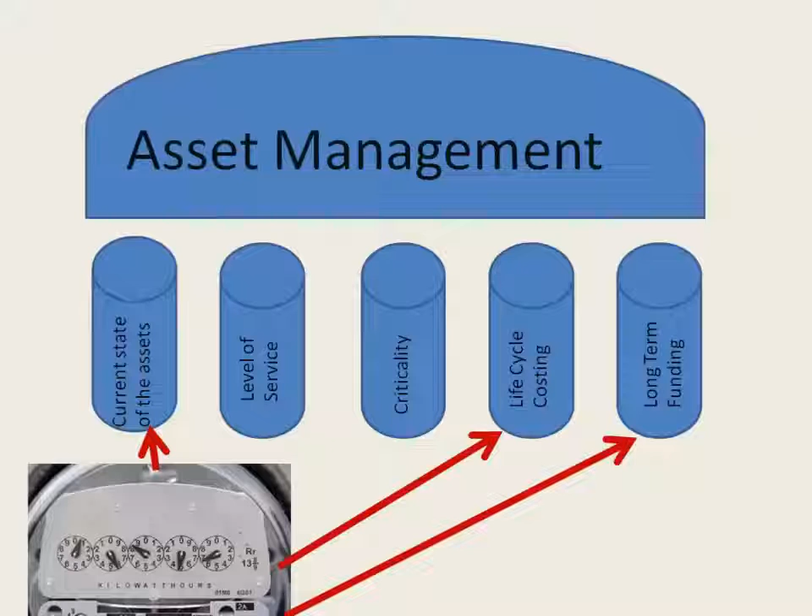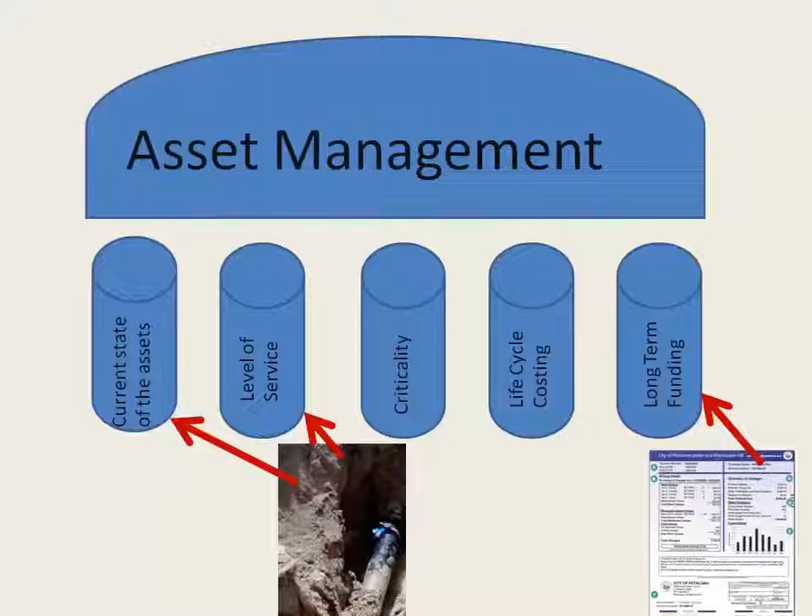One of the things we do as well is energy efficiency, and energy efficiency ties very directly to asset management. As you're doing your asset inventory during the current state of the assets, you'll collect information about the energy use of your assets. Then when you get to the process of determining in the life cycle costing segment what you want to do when you want to replace an asset and what you want to replace it with, energy efficiency is going to come back because you're going to look at whether you want to replace an existing asset with something that may be more energy efficient. Finally, energy has a big impact on the funding required because energy is oftentimes one of the most expensive components of your system.

When we get into water loss, which we are also going to talk about today, that has a direct impact on the condition of the assets, which is part of our current state of the assets. It has an impact on level of service because we may set goals for how much water loss we will find acceptable. And then it also has an impact on the funding because if we're producing a lot of water that we're not selling, we have an expense, but we're not receiving the revenue from that.

Another very big aspect of our work is rates and fiscal planning. Much of the revenue for water systems comes from fees and charges to users, so it's very important to know how to set those rates because that will have a big impact on the funding available to do all the other parts of asset management.

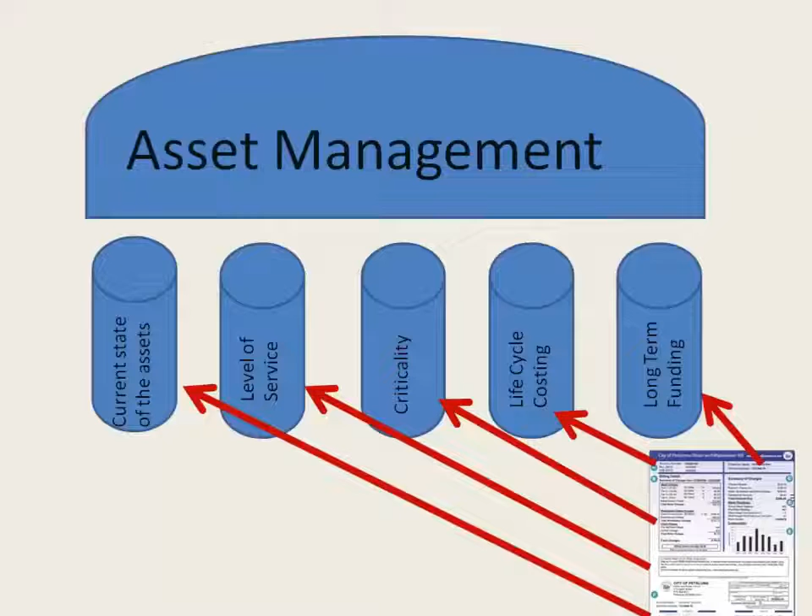Finally, I'd like to just talk a little bit about water system cooperation. When water systems work together, it can help them in a lot of different ways, and cooperation can be anything from just talking to each other up to sharing operators or bookkeepers, sharing management, to the other end of the spectrum being actually interconnecting with somebody else and forming a new water utility. If systems use cooperation just to help work through asset management alone, it can help you get through all 5 core components.

You might not have any other connection with the system, but you might want to work with them and say, let's work through an asset inventory together, or let's look at how you set level of service goals. So look to each other to help out in that area.

Energy efficiency and water loss are very directly connected as well. When we produce water that's leaking out of the pipe, we have to use energy to produce that water. So if we can cut down our water loss, we will cut down our energy use. Energy efficiency and water loss management are the two most controllable costs that go into our rates. So if we can reduce those costs, it can help us by allowing us to have money for other things, or help us out with the rates.

Small systems don't really have the economy of scale that a bigger system has. So it's important for us to look for ways to achieve that economy of scale, and one of those ways is by working together. I mentioned several ways that systems can work together. If you find a way to work together, it can help you reduce your overall cost.

So back to today's topic. Today's topic, we want to look at aging infrastructure with specifically a focus on the impact on water loss. So a quick review of webinar 1.

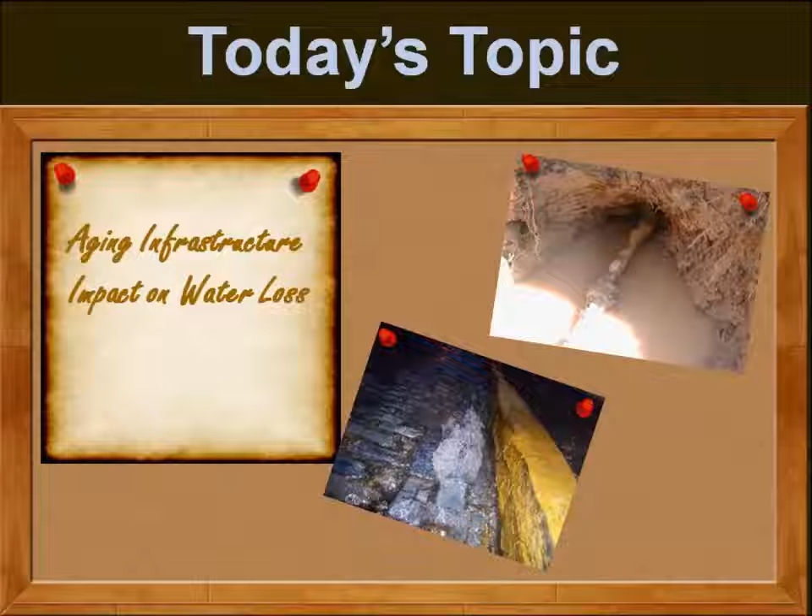What do we want to think about when we're talking about aging infrastructure? One of the things we talked about last time, which is very important, is what do we really mean by the term aging? We want to get away from the thought that all we're talking about is how old a specific asset is, because age is but one factor that determines the condition of an asset and what you want an asset to do.

So we really want to get beyond that and think of aging infrastructure as really when our assets are starting to reach the end of what we call our useful life. We'll talk a little bit more about useful life in a moment.

We want to look at our systems not as an entire combined holistic system. In this case, we want to look at individual assets and how those individual assets are performing. So again, when we get to our useful life, we want to look at the useful life of individual assets, and not a whole system, or even a class of assets together, like all hydrants, because they're not all going to act the same or last the same amount of time. So we really do want to get down to individual assets.

We want to think about all of our asset classes. Oftentimes when we think about aging infrastructure, it's discussed in the context of just our piping assets. We really want to think about all of our assets, vertical and horizontal. Horizontal assets are those in the field, like your pipe, your hydrants, your tanks. Vertical assets are your pumps, your wells, your treatment units, and we want to think about both of those.

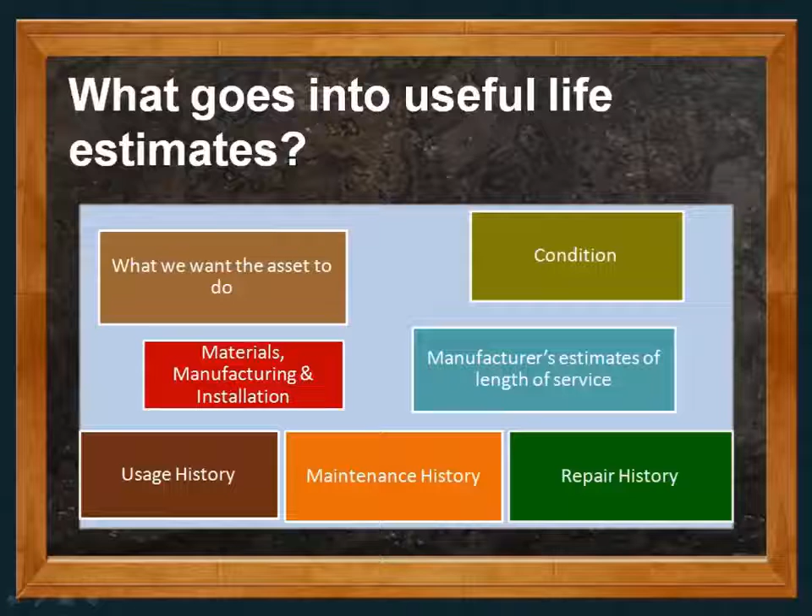For today, we want to concentrate just on our piping system and just looking at distribution piping. So I'll bring back this useful life estimate of piping, and what we're going to talk about is two things: one is what we want the pipe to do, and the other is all the rest of this stuff and how that impacts the degradation or aging of the pipe.

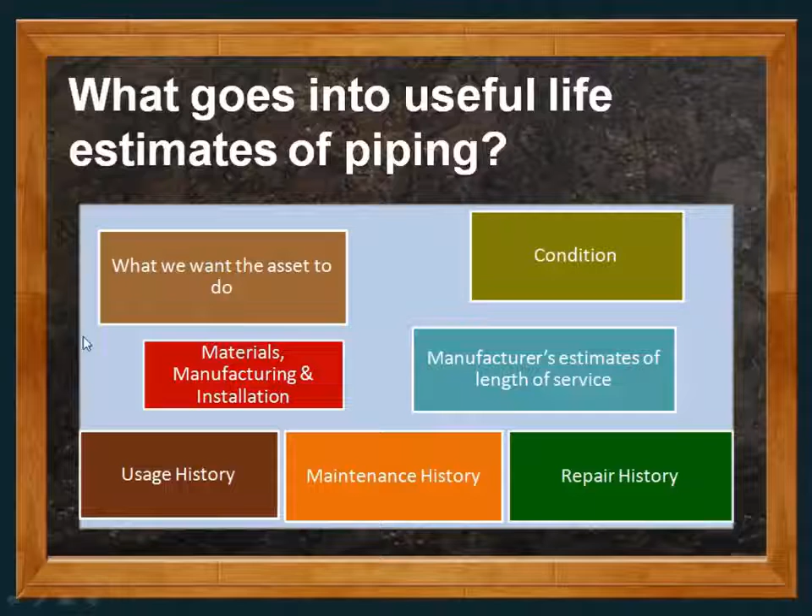So when we have pipe, what might we want that pipe to do, or how might we want to set a level of service for our pipes? We might want to look at things like the number of breaks per mile, or the number of breaks per segment, however you want to break that up. We might want to have a value and say we'll accept this many breaks per mile or per segment, but we really don't want any more, and if a pipe reaches that level, maybe that's the point where we need to replace it.

We might want to look at things like the number of service interruptions, either per customer or per year. We might want to see how much are we shutting people off. We might want to look at the amount of real water loss and set a value and say we're only going to accept so much water loss.

We might want to have a number of catastrophic breaks, and when I mean a catastrophic break, something that's not just water flowing down the street, but something that causes a lot more problems. Maybe it causes a major sinkhole, or causes a road collapse, or causes a problem for a business, or something like that - when the water has a much bigger problem than just a typical main break where some water runs down the street and we can fix it.

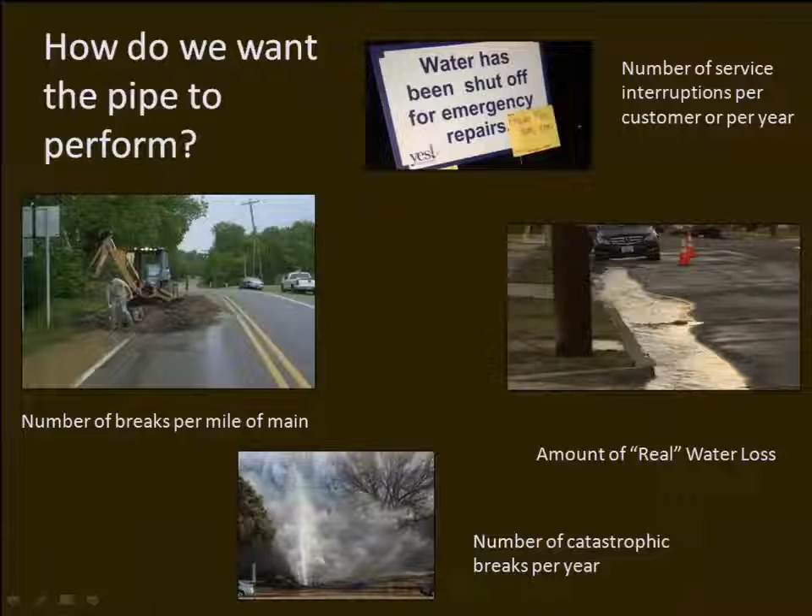So all the other factors I'm going to kind of lump into: how do the pipes age? How do they degrade? How do we get from a brand new piece of pipe to one where there's been a lot of degradation, there's holes, there's missing pieces of pipe? How do we go from one state to the other? There's a lot of factors that go into that, and I've separated them into three different categories. The first category being physical.

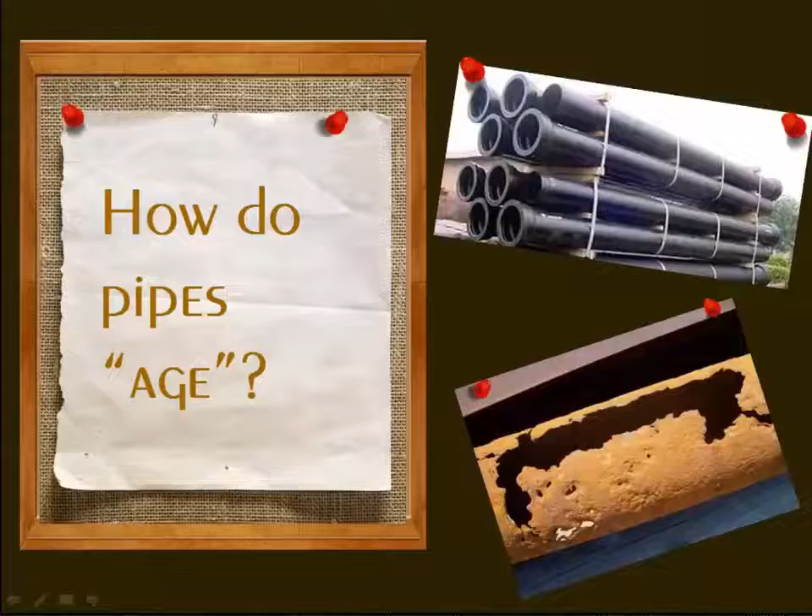The major factors affecting deterioration are age, length, material, diameter, manufacturer, joint type, the vintage, lining and or coatings, how deep the pipe is buried, installation, wall thickness. So all of these physical factors that make up the pipe will affect its deterioration.

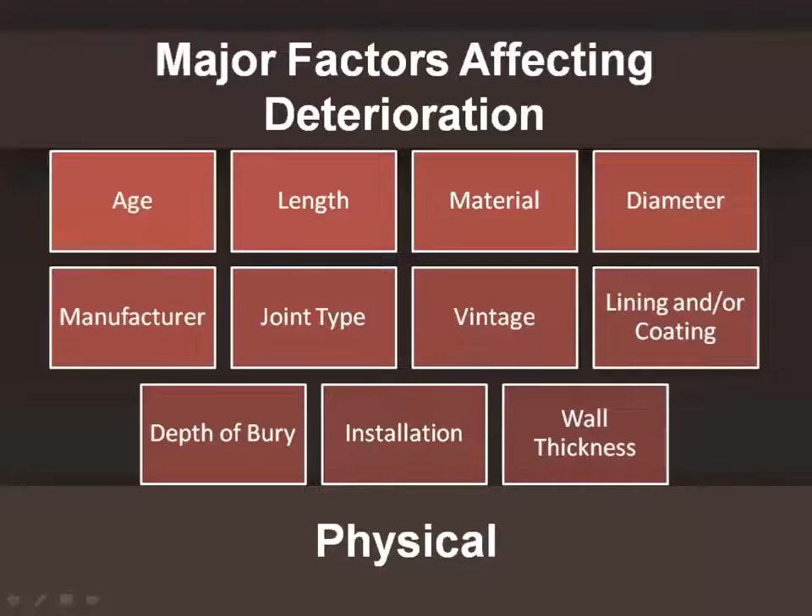The next is operation and maintenance: break history, cathodic protection, whether you've protected the pipe, and water quality inside your pipe. Repair and rehabilitation methods, the flow velocity through the pipe, what kind of O&M you do, like flushing or cleaning the lines, how you operate your hydrants, and whether there's water hammer if someone's not doing it properly. And then finally, the internal water pressure—what is that pressure inside the pipe, and does it vary a lot, or is it pretty constant?

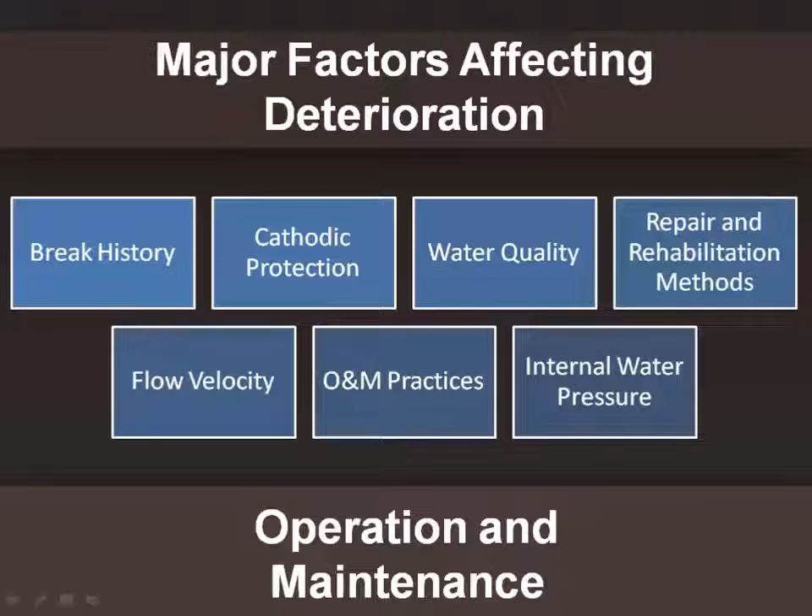Then environmental factors—things affecting the pipe from the outside. The surrounding soils, frost, traffic loading, and the quality of water outside the pipe. If this pipe is subjected to groundwater, what is the quality of that water? The bedding under the pipe or the backfill above it. If there are any stray electrical currents from other utilities around the pipe, or underground disturbances like construction going on near the pipe. And finally, the climate it's subjected to—like here in Albuquerque, it's desert conditions, relatively mild, whereas in Buffalo you're subject to very cold and snowy, or in Washington State, a different climate. All of these factors add up to affect the pipe.

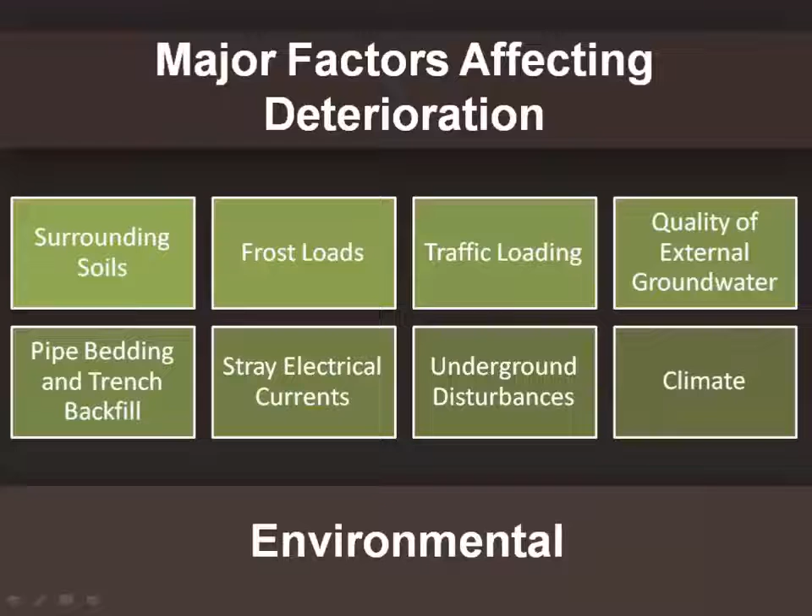The deterioration can be internal or external or both. Forces acting on the outside of the pipe can have it degrade from the outside in, or forces acting on the inside of the pipe can have it degrade from the inside out.

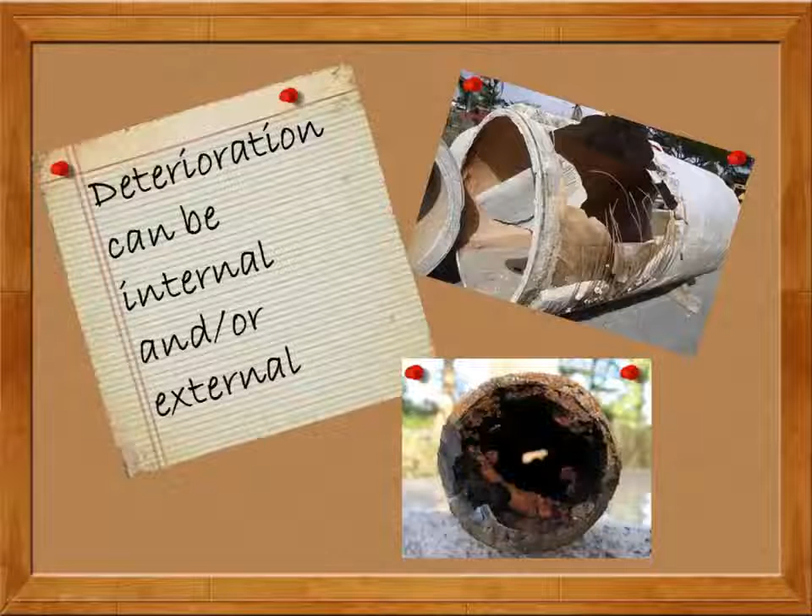The problem is that we don't really have a good way to determine the condition of this underground infrastructure. It's not possible for us to see inside and outside the pipes all the time. We may get a glimpse of a pipe during a repair, but generally we don't really get to see the inside or outside of our pipes. As we just discussed, there's a really complicated mechanism for deterioration—all those factors acting on a pipe—so it's very complicated to figure out how each of those factors affects the pipe. The deterioration is very site-specific, and it's hard to study in situ, meaning in actual ground conditions, because it's hard to see what's actually happening. For all these reasons, it's not that easy to determine the actual condition of your underground infrastructure.

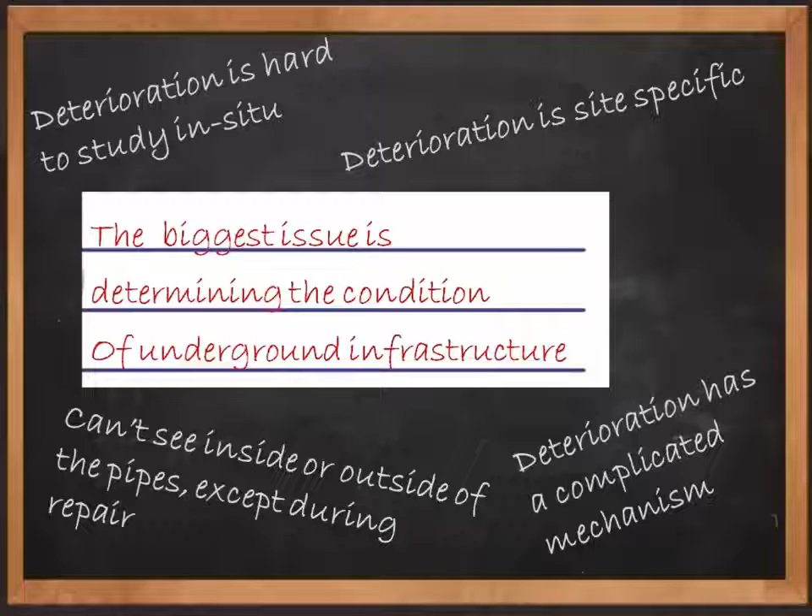There are some technologies that will help us get a better picture of what's going on in our pipes. There are several of them. Some are devices that you put inside a pipe, and some stay outside the pipe where you just hit a connection point and can figure out things like wall thicknesses. Some can take videos of the inside of a pipe, and some can check for leak noises or look for leaks.

The problem is these technologies tend to be pretty expensive to deploy. They take skilled workers to put them in, and a group who can analyze the data. Sometimes you have to build insertion points to put the devices into the system. So for very small systems, this is not going to be something you'll want to do because it's too expensive. The results are also dependent on the technology you use—you'll get different results depending on what technology you use. It's not like all the technologies provide you the exact same data; some give different data than others.

And then there's converting the results into actionable information. Once you know the condition from this evaluation, what do you do about it? How do you translate that into exactly when you should replace the pipe? Sometimes that's not as easy as we would like. And finally, you have to match the technology to the pipe—you have to look at whether this technology will work on a certain kind of pipe or size of pipe, that type of thing.

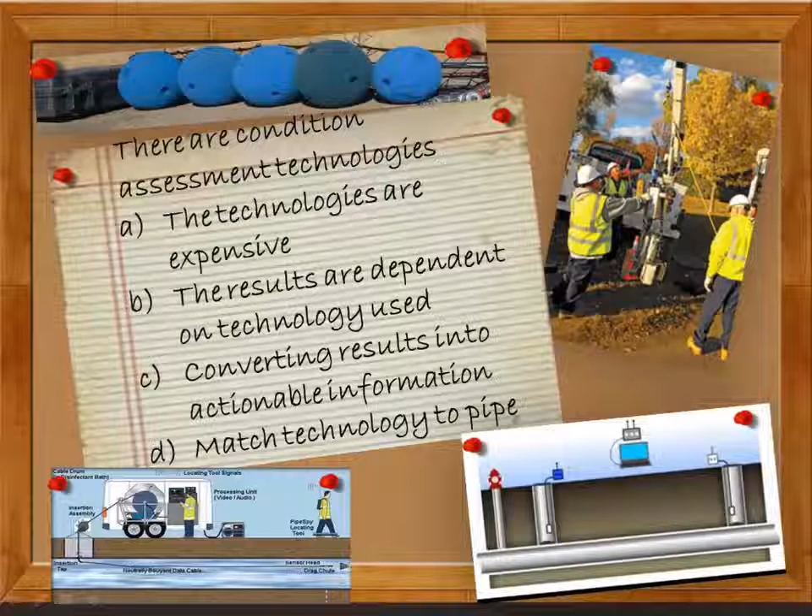So if we don't really have a way to get inside the pipes and really find out what's going on, what else can we do? A lot of what we're going to do is rely on the past performance and using whatever we do know about the pipe. So we might know things like what size, type, diameter, depth of bury, all those factors that we talked about in the first couple of slides. We can know a lot of those things. We can know soil characteristics.

So what we want to do is really get good information. Every time a pipe break occurs, we want to get really good information about where was it, what was the pipe size, type, diameter, any other information about that break, what kind of break was it, circumferential, crack, pinhole, what did the pipe look like on the inside, on the outside, what did the bedding material look like, any information you can get about the pipe, as you go.

So you're going to have, collecting your external factors, your internal factors, get all this information and start plotting your breaks on a map and trying to see what are the trends. There's certain parts of your system where more breaks are occurring. What are the trends in terms of pipe type? Sometimes one pipe type is performing very differently than another. What about like a particular manufacturer of pipe or a time period of manufacturing?

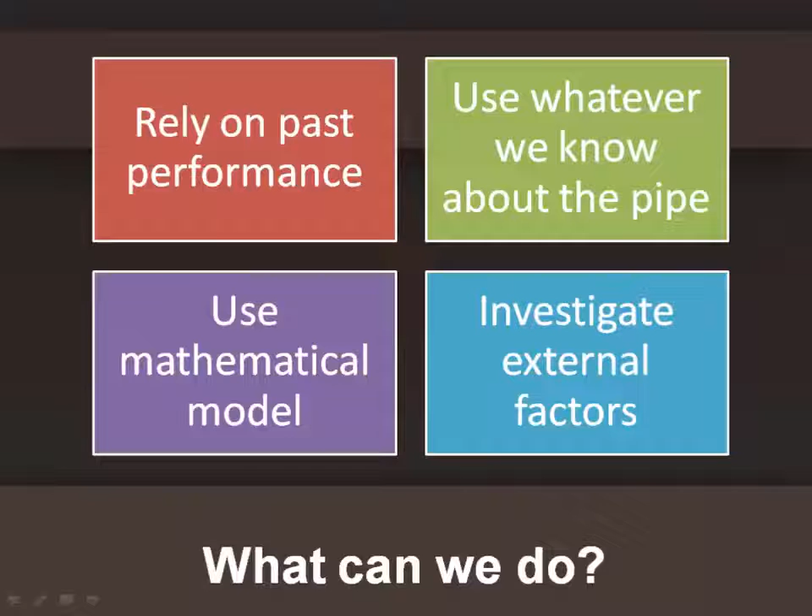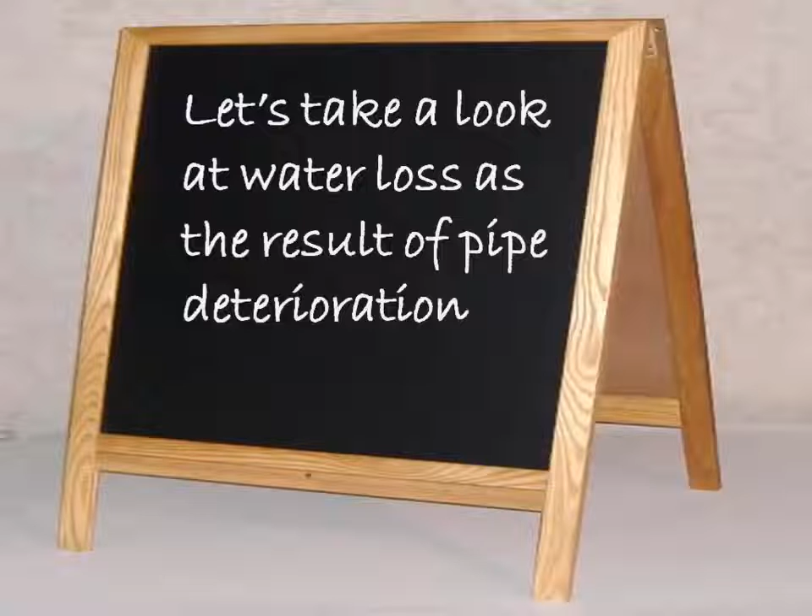So we've talked a little bit about pipe degradation and how pipes are going to deteriorate over time based on all those various factors that we discussed, the physical factors, environmental and operational factors. So one of the things that's going to happen as we get degradation is that we're going to start having some water loss. And so we want to focus a little bit on the actual water that's leaking out of pipes that have deteriorated. Maybe they have holes or cracks in them and the water is leaking out.

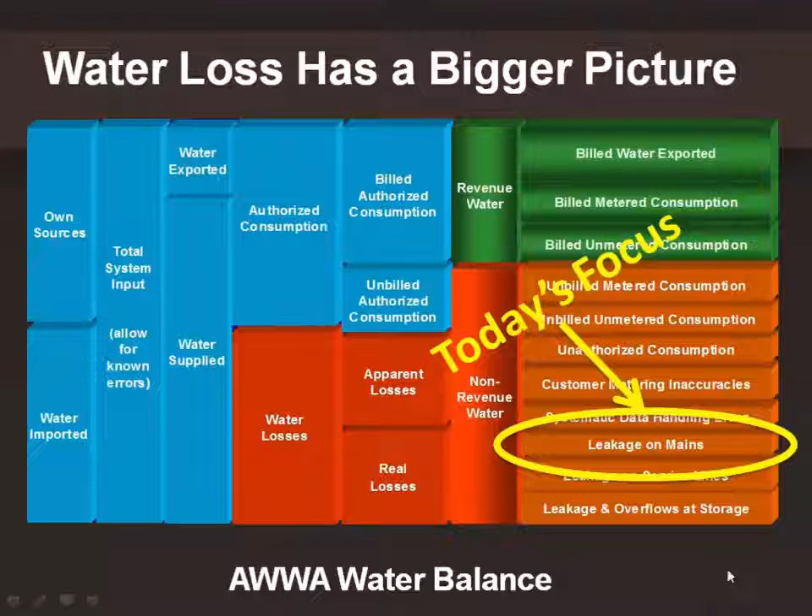As the pipe deterioration increases, the number of breaks generally increases. So basically, as the pipe is wearing out, we're going to have more breaks that will also increase the losses.

I wanted to ask a poll question and really try to get a sense for the folks who are on the phone, how big of a problem water loss is for you. So if we could go ahead and start the poll.

Oops, all right, I apologize. Is this the wrong question, Heather? Not the right one. Yeah, it should be, do you have a water loss problem, or how big of a problem water loss is. Okay, that's, sorry about that. There it goes. There you go.

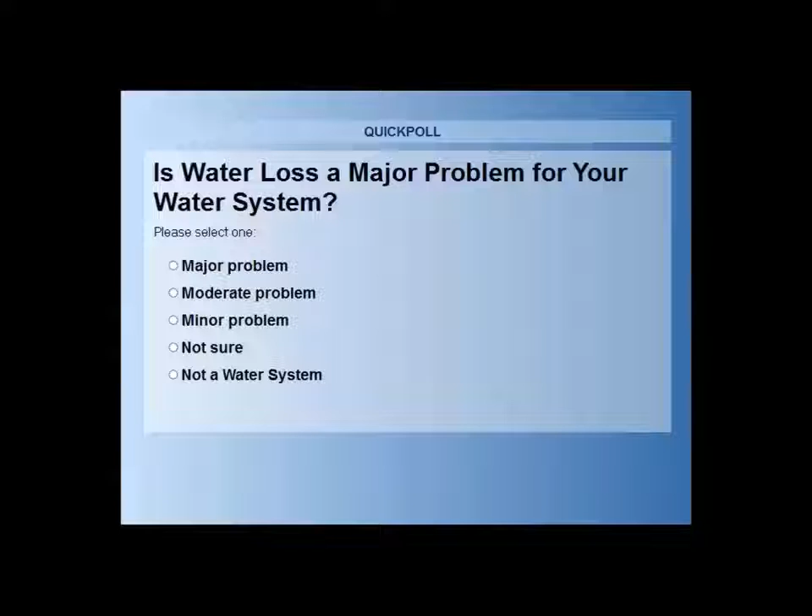So I apologize for that, but the poll question is: is water loss a major problem for your water system? A major problem, moderate problem, minor problem, not sure, or if you're not a water system, you can click the last answer. Take a couple seconds and think about how big of a problem it is for your system.

Okay, people are still clicking in, so I'm going to give it a few more seconds. Okay, and at this time I'll close the poll.

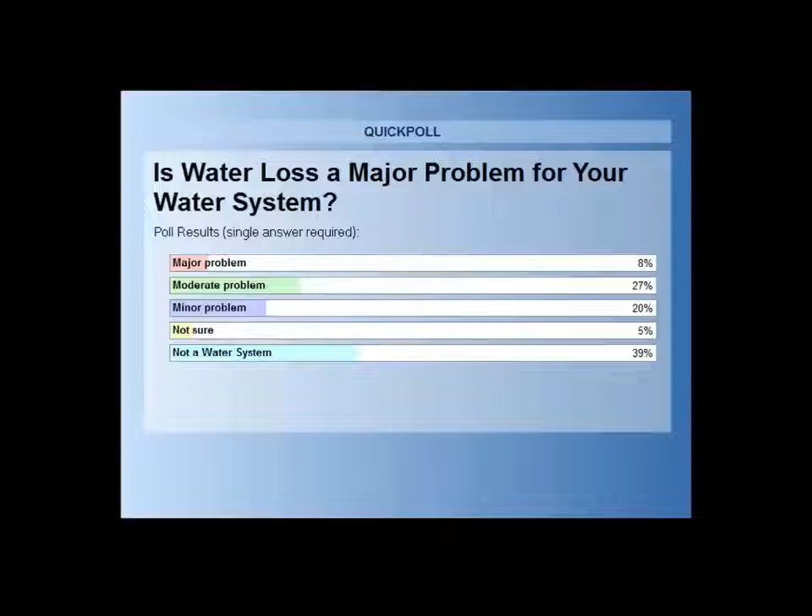Here are the results. It looks like we have moderate problem for about a little over a quarter of our attendees, and then minor problem for about 20%. And so it's only a major problem for about 8% of our audience.

When we have leaks in our pipe, we can sometimes find them because the water surfaces on the ground. So when it's actually visible, we call that a surfacing leak. There's two different kinds. We can have water flowing gently over the ground - most of our breaks are like this. Water leaks out of the pipe, surfaces on the ground through some opening, and the water seeks its easiest path. It flows down the side of the street, and we know there's a water leak. We don't know the exact location, because sometimes the leak can be very far from where it's surfacing, but at least we know in general where the leak is, and we can go find it and fix it.

Surfacing flows can also be more of a geyser, where the water shoots up out of the pipe in the air. Generally these are not as common, and it happens when the pipe is under higher pressure and other situations cause that kind of flow. When we have the geyser type, we need to get out right away and do something about it. With the ones that are just a more gentle flow on the ground, we have a little more time to deal with the problem.

The other types of leaks are ones we can't find because they're hidden. They're under the ground and we don't know they're there, and the water hasn't surfaced. There definitely are leaks that are difficult to find because of where the leak is, the soil type, and lots of other reasons. Sometimes there's a small leak we just can't find. The problem with hidden leaks is that if they go for a long time, months or years, we can lose quite a bit of water out those small leaks. Even though, like geyser flows, we're losing a lot of water in a short amount of time, if you take a small leak and stretch it over a longer time, you'll lose a lot more water. So we really want to be thinking about what we're going to do about the leaks we can't find.

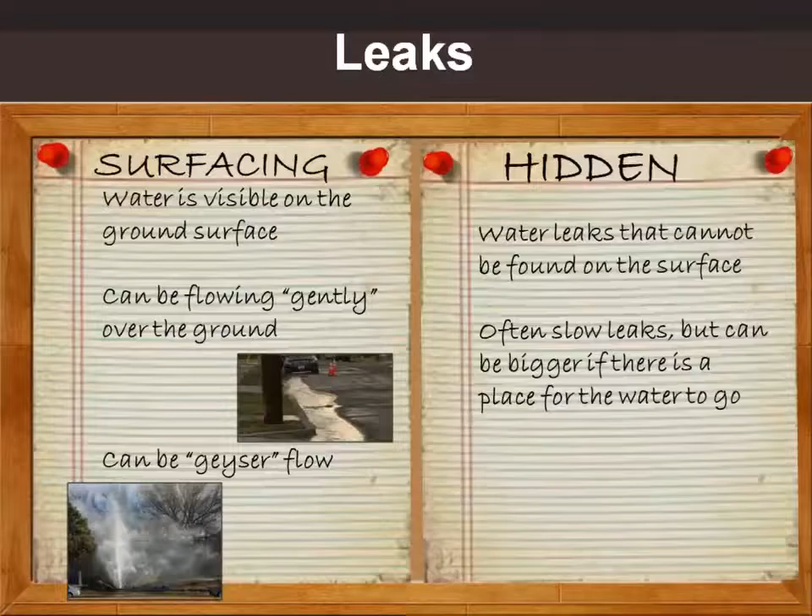There are two ways to find these hidden leaks. One is to actively go look for them, and the other way is to wait until some catastrophic event occurs, a long time later, because eventually it will degrade the soil around it, or cause a major burst in the pipe, or something will happen - but it could be years later before this occurs. So you're losing a lot of water in the meantime if you don't look for your leaks. Finding leaks early can help prevent a catastrophic failure and reduce your water loss. We actually did a study once where we left a very small leak go for close to a 2-year period and never saw anything on the ground whatsoever.

We eventually decided that we couldn't really wait anymore, and we did fix the leak. But it is something where you can have these hidden leaks, and they can go for quite a long time.

There was another leak where a water pipe had actually bored a hole in a sewer pipe that was below it, and water was running from the water pipe into the sewer pipe. So until we had maybe a catastrophic event, where the sewer would eventually fail because there was now a hole in the top of it, maybe we would have found it that way. But by looking for it, we were able to fix it before that became a major event.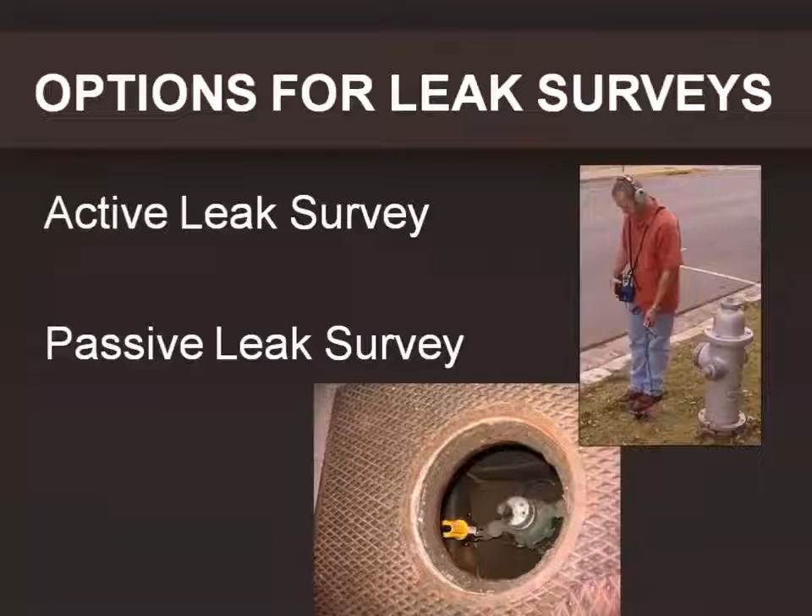There's two options to look for leaks. You can do an active leak survey, where somebody's walking around with listening equipment, listening to say hydrants, valves, meters. And the other way is a passive leak survey, where you actually put a device in your system. It could be on a meter or a valve box.

So with an active survey, you could hire somebody to go through your entire system, survey all the hydrants, meters, valves, and let you know where they have heard leak noises in the system and where they believe there are leaks. You can even buy your own equipment and get trained on how to use it, but it's the kind of thing that if you don't do it a lot, you'll lose that skill. So if it's something you're going to do very seldom, you probably want to hire somebody to come in and do it for you. If it's something you think you would use a lot, then it might be worth investing in the equipment and getting the training.

In addition to surveying the entire system, you can also survey part of the system. Going back to what we talked about previously, about gathering data on what's going on in your system - if you have a map of where the breaks occur, or some idea of what portion of your system is causing the most problems, you can choose to survey those portions of most concern and not bother with the rest. Save yourself a lot of money, but get most of the data you need.

So if you find out that, say, 75% of your breaks are in maybe a third of the system, just survey that third, and you'll catch most of what's going on at a fraction of the cost. You can also do a sampling of the system, where you might choose to look at a little bit of each pipe type, see what you find, and then decide how to go on from there. So there's a couple different ways to do an active survey.

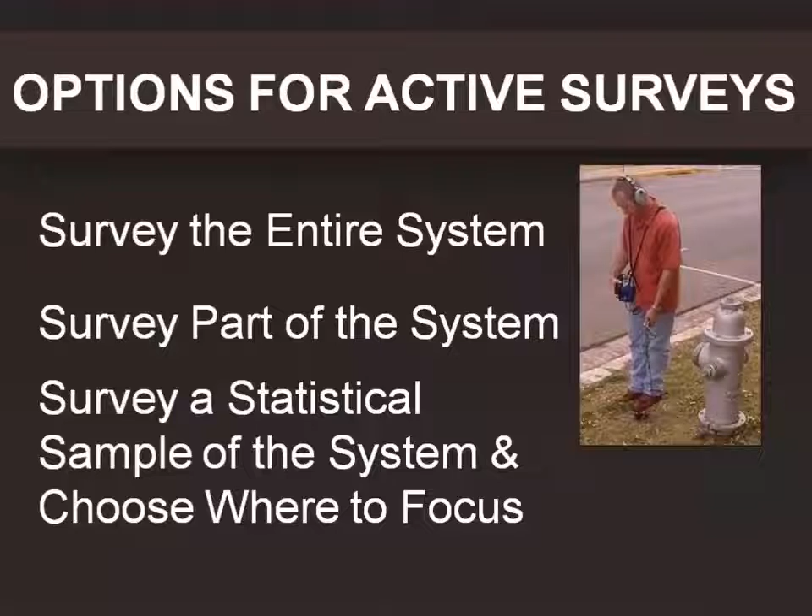A passive survey is where you get some kind of device that listens for leaks at night and then provides you data, either electronically to your computer, or you drive around with a gadget that collects the information and tells you it's heard a noise. Most of the time, they can't tell you it's specifically a leak noise, but they will say they heard a noise, and you can investigate to see if it truly is a leak or not.

You can either do a full deployment, where you buy devices and put them throughout your system, or you can do what we call lift and shift, where you buy a few devices and keep moving them around the system. And then there are combinations of doing a partial deployment and a partial deployment with lift and shift. So there's a couple different options.

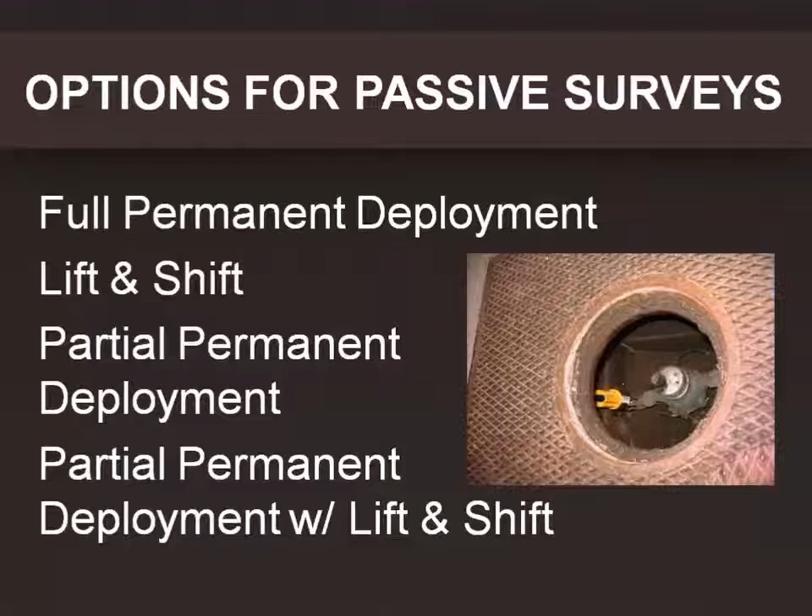Thinking about active versus passive leak detection, some of the considerations in choosing is the cost of devices. Those little listening devices cost money, and how much do you want to invest in those devices versus buying equipment, getting trained to do an active survey, or the cost of hiring somebody to come in and do that.

What type of pipe do you have? How much water loss do you have? All of these kinds of factors go into whether you're going to pick to do an active or passive survey, because not all the techniques work on all pipe types.

You need to know how many contact points you have, and a contact point is something like a hydrant, a valve, a meter, a place where you can gain access to the underground system. When you're listening, you have to have a device that can connect to the water lines down below, and it connects through items like a hydrant, a valve, a meter. If those points are very few and spread out far, it'll be much harder to hear leak noises. So that can impact what you choose to do and how you choose to do it.

So this one will be that poll question on, do you have a leak detection program, which is the question we had up first. So if we could go ahead and start the poll.

Heather, just to confirm, the question that I have reads, do you have a program to look for leaks? Yes. Okay, here it goes.

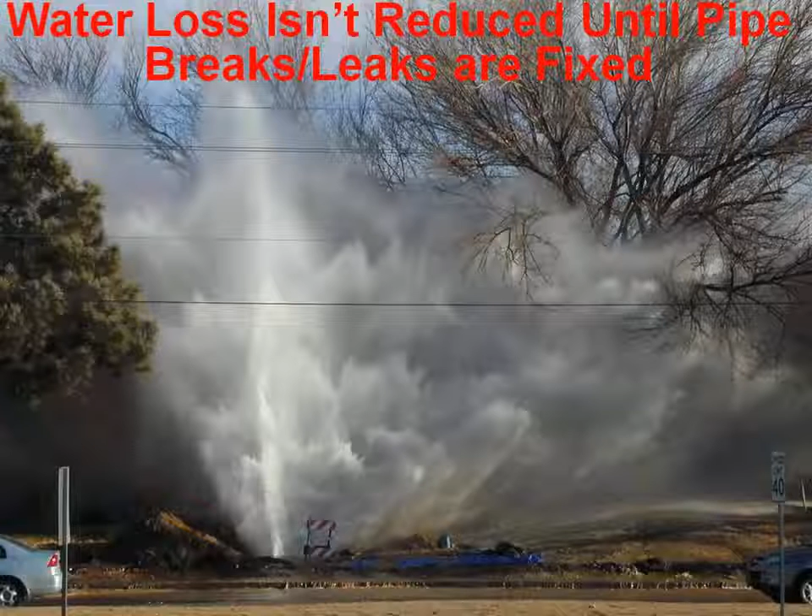The big thing with water losses, and this occurs when people get gung-ho about looking for leaks, is we really need to keep in mind that we don't reduce any water loss until we actually fix the pipe or fix the leaks. Finding the leaks in and of itself is not going to stop or lessen our water loss. We actually have to fix the pipe.

So we have a couple different options about what to do when we find a leak. One is to just leave the pipe in place and fix the leak, putting a clamp on it or something similar, where we're leaving the pipe in place and just stopping that leak. Another option would be to replace just a short segment of pipe, maybe 5 or 10 feet, leaving the rest of the pipe in place but splicing in a small portion because maybe the break was too big to clamp.

We can also replace the pipe entirely. We can replace it with the same type of pipe, or with a different type. If it's metallic, we could use plastic. If it's cast iron, we could use a different kind of metallic pipe, like ductile iron. Or if it's PVC, we can replace it with another PVC. Or if it's ductile iron, we could replace it with another ductile iron. So we can replace it with the same or different material.

Finally, we have an option to maybe rehabilitate the pipe. This is way more common on the wastewater side than the water side, where we have the ability to line pipe. There's a little less ability on the water side, but there may be some options for, say, pipe bursting, which is kind of a quasi-replace, rehabilitate option. And there may be some lining potential with some of the water pipe.

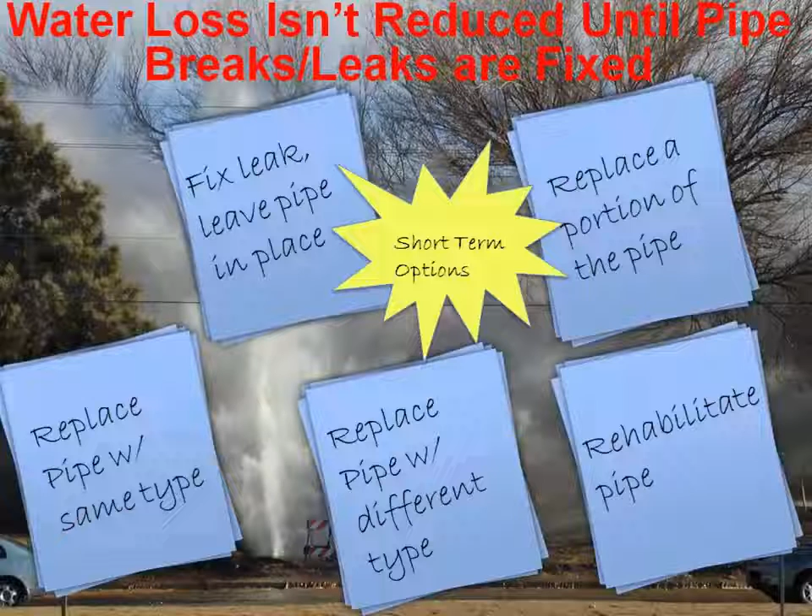So these are all of our options. In the first couple, fixing the leak and replacing a small portion are more short-term; we're leaving that pipe in place, allowing it to continue in service and reach the end of its useful life. The other three are more longer-term, meaning we're extending the pipe life, giving it almost like a brand new pipe life. So we have short-term and longer-term options. In the short-term options, what we want to think about is the underlying condition of the pipe.

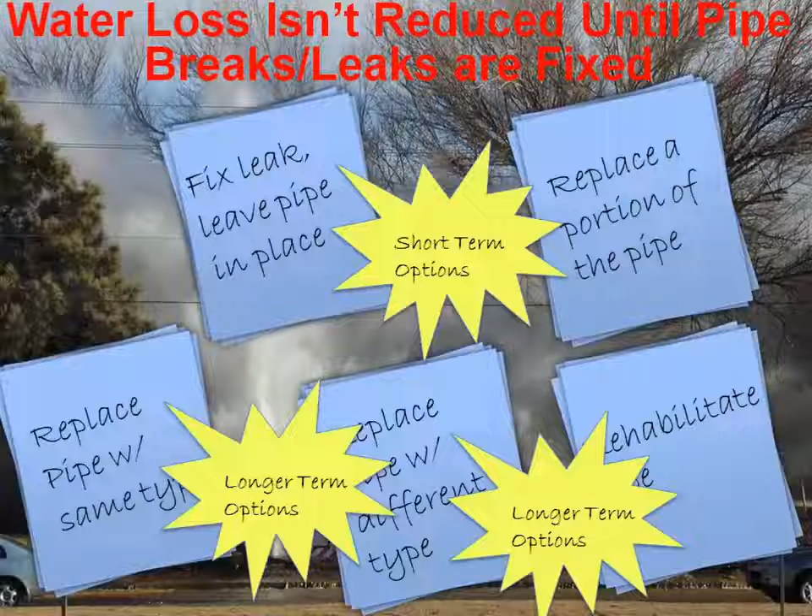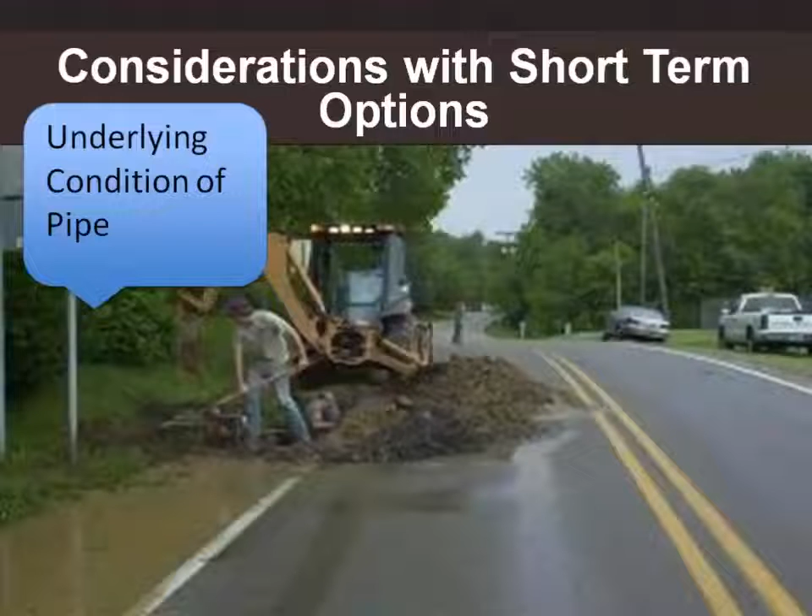If the rest of the pipe seems to be in decent condition, it makes a lot of sense to use a short-term option, especially if the underlying structural integrity is there. But if the pipe has almost no structural integrity and the condition is terrible, putting a clamp on it can just cause it to break somewhere else.

I've seen pieces of pipe where there's almost nothing left but a series of clamps, because every time you put a clamp on, it causes it to break at another weak point. When you get to that point, a short-term option doesn't make sense because you're not really extending the pipe life, you're just putting a Band-Aid on it.

So we really want to think about what the pipe is actually like, and whether it's worth doing a short-term option. What's the life expectancy of the overall pipe? If you should have another 10, 20, 30, 40 years of life in that pipe, it makes a lot of sense to do some of these shorter term options.

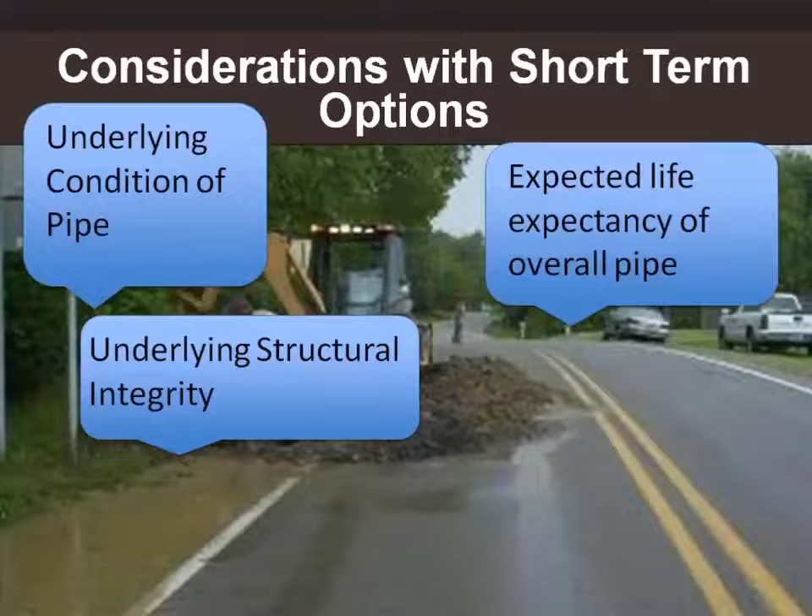If we think it's really at the end of its useful life, maybe it makes more sense to just replace the pipe. We want to think about what's happening with the adjacent infrastructure, the roadways. Is that road going to be replaced sometime soon? If it is, then we probably want to think about replacement rather than a short-term option.

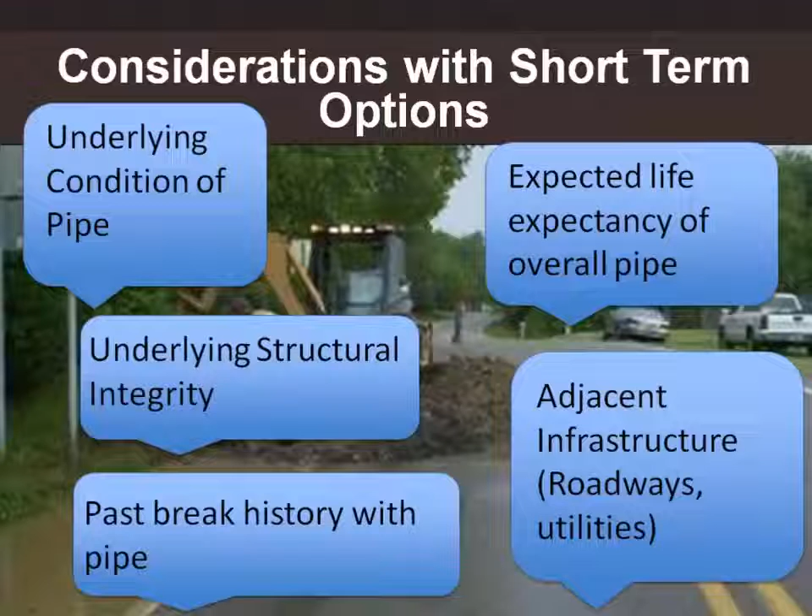And then finally, what's our past break history? If it's been breaking a lot, that may make us choose to replace it versus doing one of these short-term options. No matter what, eventually all of our pipe will have to be replaced. We can stretch it out as long as possible, but eventually it all has to be replaced. So the period by which we replace it is called our replacement cycle.

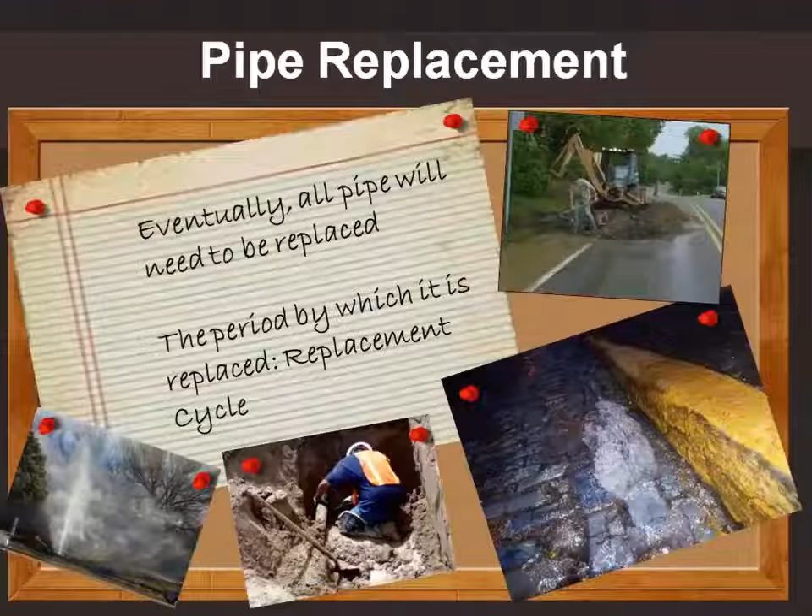So how soon do we want to replace that pipe? We think about when our pipe was put in, and for simplicity I've used decades instead of years. Our pipe went in installation waves. Your community didn't grow in exactly the same increments - it grew a lot, maybe fell off, and grew some more. So you're going to see installation waves as you put in the pipe.

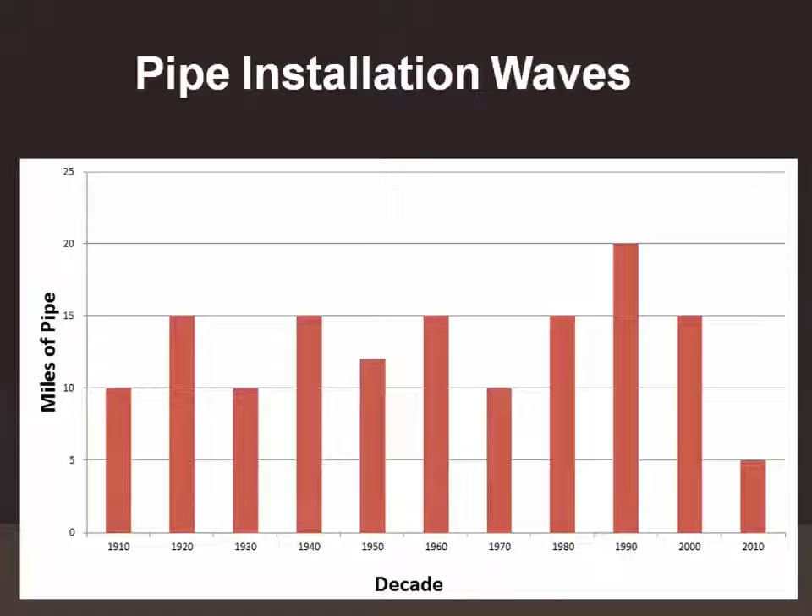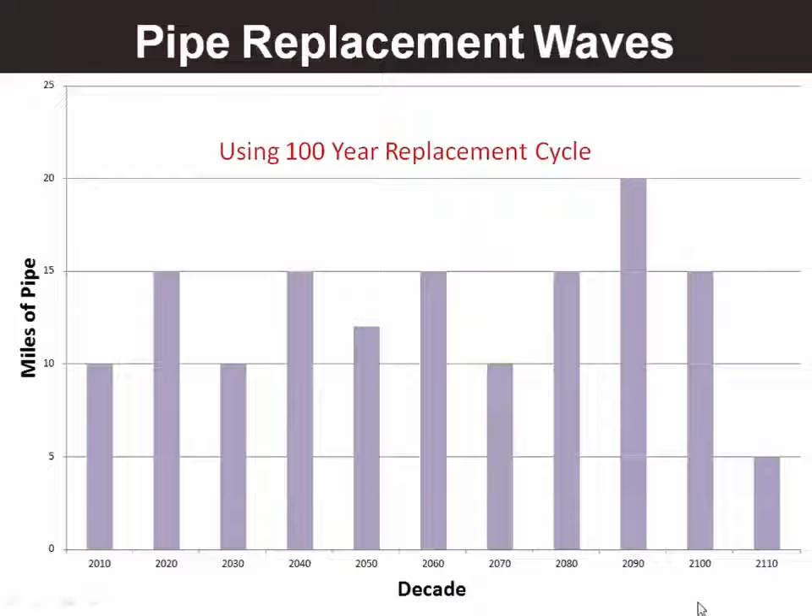That's typically not what we really see happen in actual practice for a couple of reasons. One is each of those installation waves means different kinds of pipe types, different techniques of construction, different manufacturing techniques. So it's not like everything we put in 1910 is going to magically fall apart in 2010. What actually happens in 2010 may be stuff from 1940, 1930, 1910, 1950 - it's going to be a whole mix of pipe, because some of the pipe from 1910 is going to last a long time, and some of it will need to be replaced.

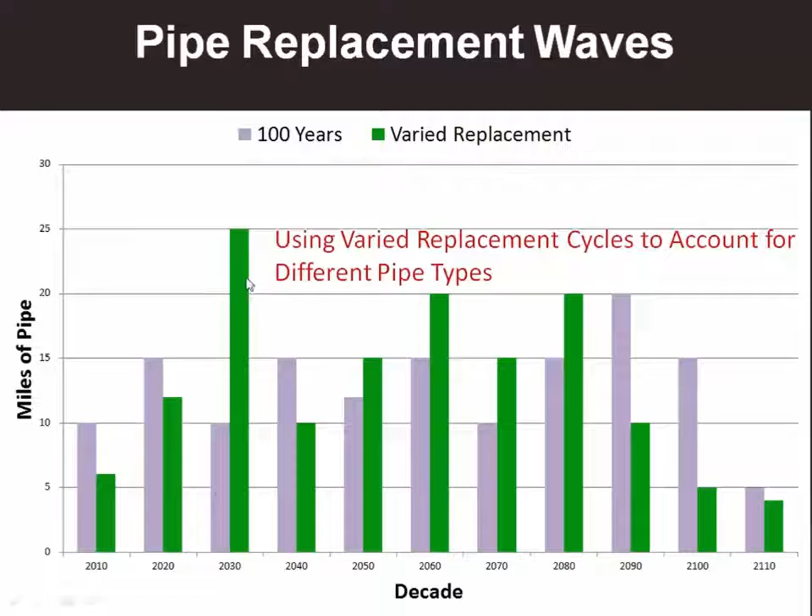Another issue with our actual replacement comes down to money. We don't really have the luxury of saying that we will replace every pipe 100 years from now. We are living in a world where you only have so much money and you have to decide how to spend it, so oftentimes pipe is one of the things that the money is not spent on. As the money goes down, our replacement is going to change.

So if we look at our example, and I'm keeping this very simple, there's 142 miles of pipe in our example. I'm not going to assume any price inflation, and we're going to use a $500,000 per mile replacement cost - that's kind of average. Some of you probably experience way higher, and some might have a little less, but that's not a bad number to pick.

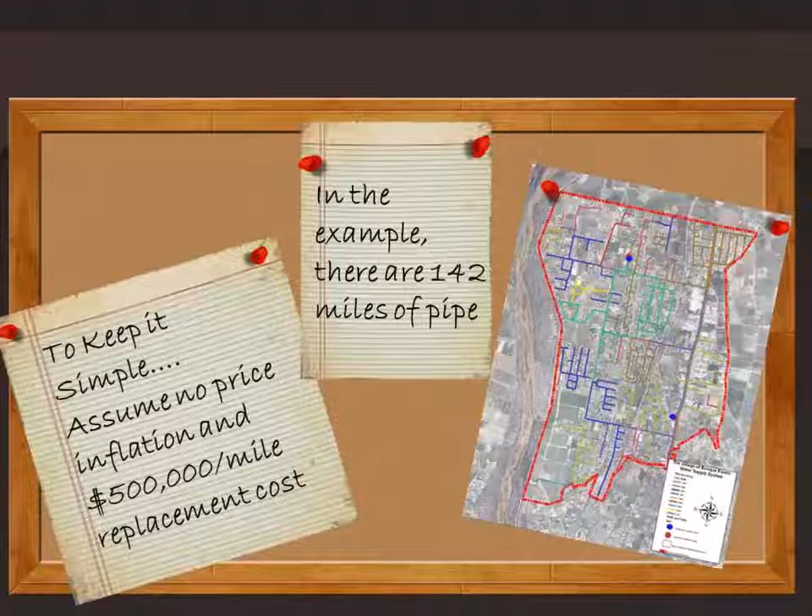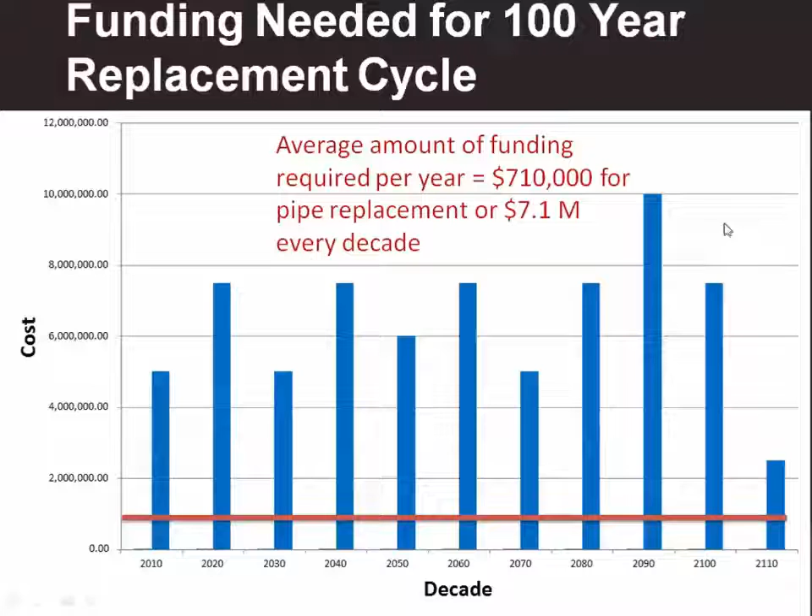Every year you might choose to say, well, every decade I'm going to spend $7.1 million and I'll replace roughly 14 miles of pipe. But it has to, on average, work out to be $710,000 for you to hit a 100-year replacement cycle. So if you end up with less funding, say you only get $473,000, now we have a 150-year replacement cycle. Or if we only get $355,000 per year on average, we have a 200-year replacement cycle.

What that means is there will be pipe in the ground for at least 150 years after it was put in. Some of the pipe may actually have to be in longer because some of the other pipe is not going to make it 150 years. So you can see how when you drop the amount you're willing to invest, your pipe has to be in the ground a lot longer.

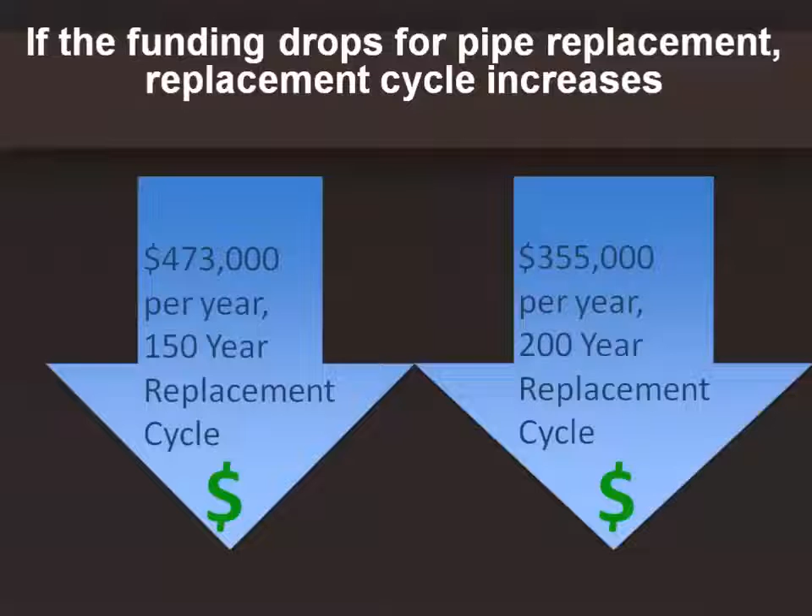Delaying that replacement cycle can really increase your water loss because you're going to have a lot more breaks, a lot more degradation, a lot more pinholes. So water is going to be leaking out the pipe, and it will have less ability to handle the pressures that you're putting the pipe through. So you're going to get more water loss. You're going to have more catastrophic failures.

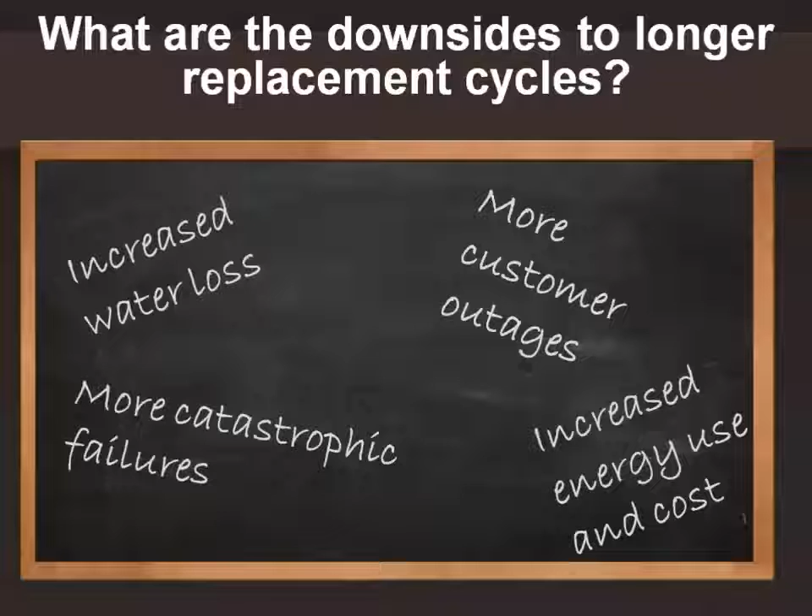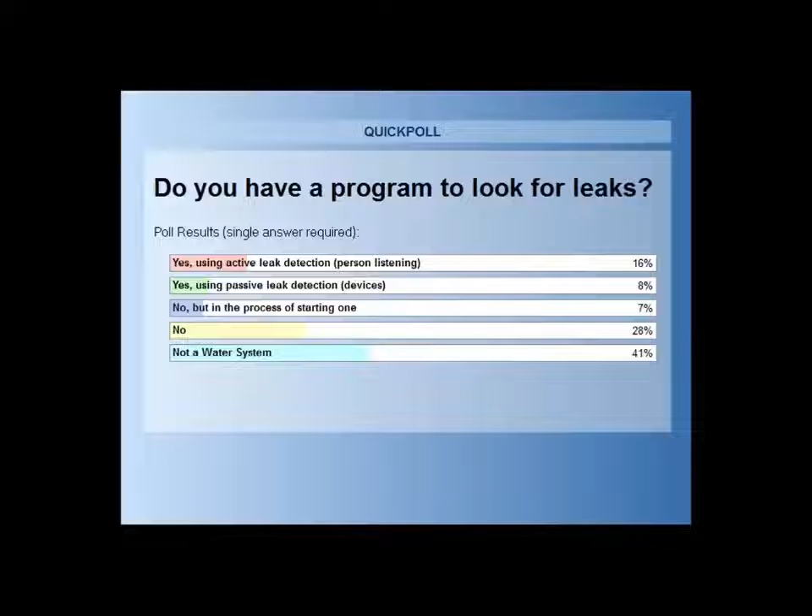I thought I would ask a poll question about finding out about your replacement cycle, like at what time periods do you replace? You may not even know because you may not have thought through it, but do you think you're on a cycle? Make your best guess. Do you think you're replacing your pipes about every 100 years or so? 100 to 150 years, more than 150 years, no idea, or you're not operating a water system. So just give it your best guess of how frequently you think you're actually replacing the pipe in your system, and how much investment you have in pipe.

Okay, so we have 19% that are 100 years or less, which is a good replacement cycle. 9% that are 100 to 150, 8% that are more than 150, 24% no idea, which, if you haven't really thought about it and haven't really gone through the process of figuring it out, you wouldn't know how frequently you're replacing it until you really sit down and think about what this investment in water pipe infrastructure actually means. All right, we can go back to the presentation now.

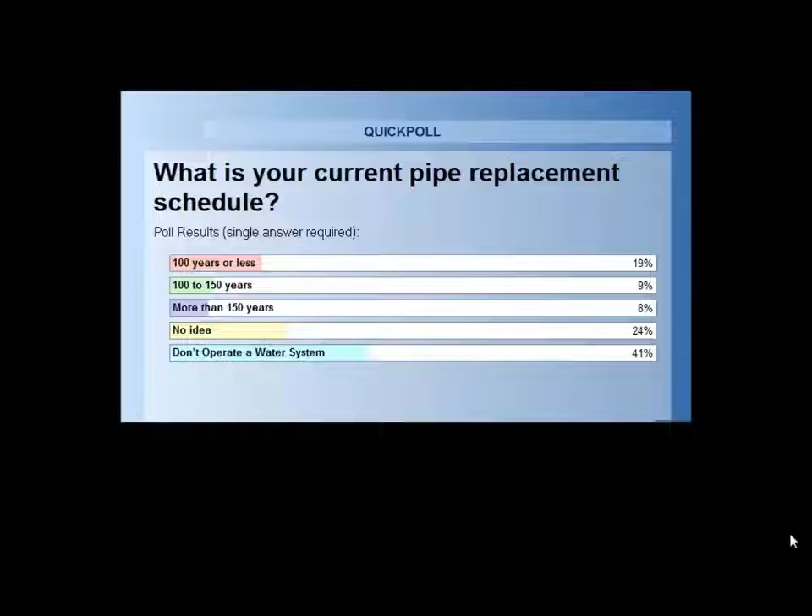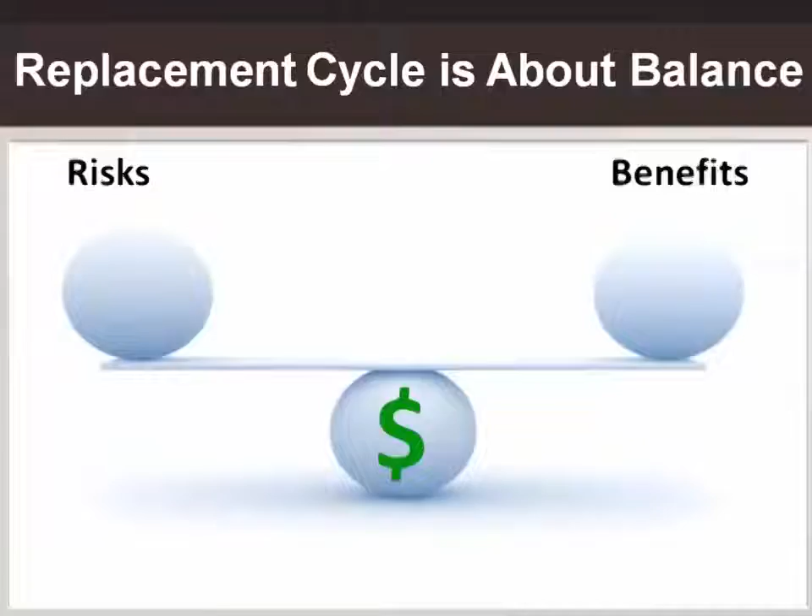So the replacement cycle is really about balancing the risks with the benefits and the money that you have available. So when you spend less money on pipe replacement, the risks of having greater water loss, more catastrophic events, more problems is going to go up. And the benefits are certainly going to go down. If you spend more money, the risks go down and the benefits go up. I think it's really important for us to communicate this to our leaders, that when they're choosing what to invest in our water infrastructure, our pipe infrastructure, the connection between risks and benefits is very, very clear.

If you choose to have your replacement cycle be 150, 200 years, that's investing less money. And so your risks are going to go up. There is going to be more trouble in your system. So there is a trade-off. It's not like there's no price to be paid for investing less in your water infrastructure.

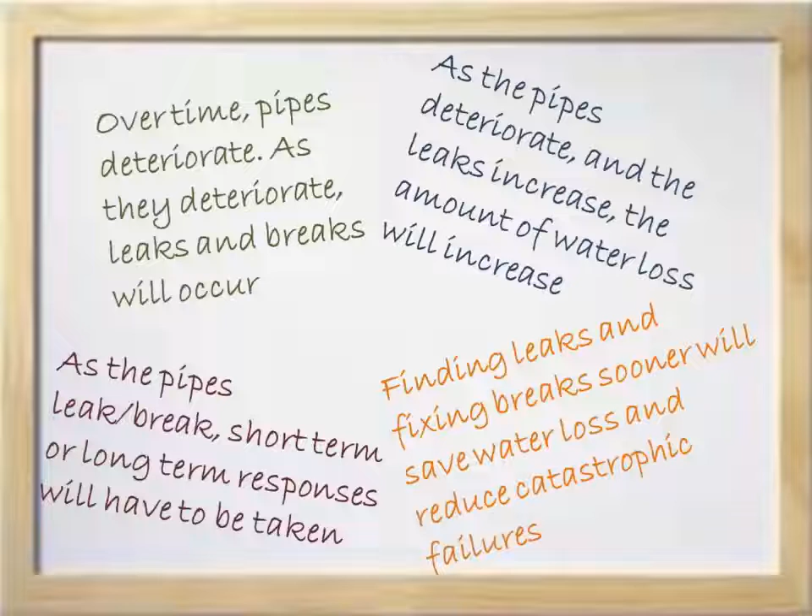So in summary, over time, pipes are going to deteriorate. As they deteriorate, leaks and breaks are going to occur. The leaks are going to increase, which will also increase the amount of water loss. We can offset that by finding the leaks and fixing the breaks sooner, because that's going to save water and also reduce our catastrophic failure, so it will save us money. And then as the pipes break, we do need to take a short or long-term response. We either have to fix the leak with some kind of clamp or something like that, or we have to replace the pipe.

So finishing up with taking it to your facility, develop a team to help you, like operators, managers, whoever's there, form a team to help you collect the data about your pipe breaks, have some help mapping it out, see how much information you can gain to get a better picture of your system, and then involve your finance people so you can figure out what that replacement cycle is for your pipe.

Assess your situation. Look at the information you have right now. How bad is your water loss? How many catastrophic breaks do you have a year, a month? How many other breaks do you have in your system? Where are they at? How big of a problem is it for you? Are you in the midst of a drought in which water losses are very important? Are you in a water-rich area where maybe a small amount of water loss increase isn't a problem? All of those things can enter into assessing where you are right now.

Determine if it makes sense for you to look for your hidden leaks, thinking about some of the issues we just talked about. And then if so, on what portion of the system would you do it? What type of pipe would it work on? Where are you having your biggest problems? Where do you want to do that leak detection?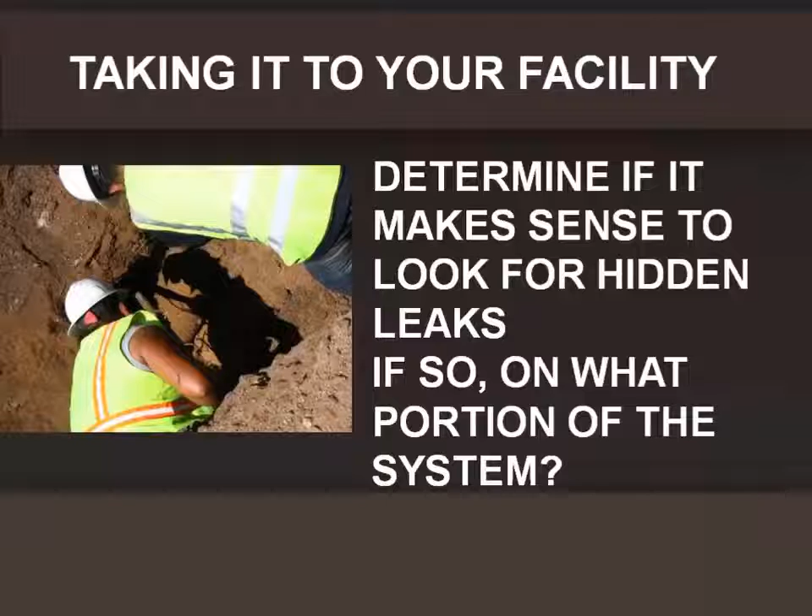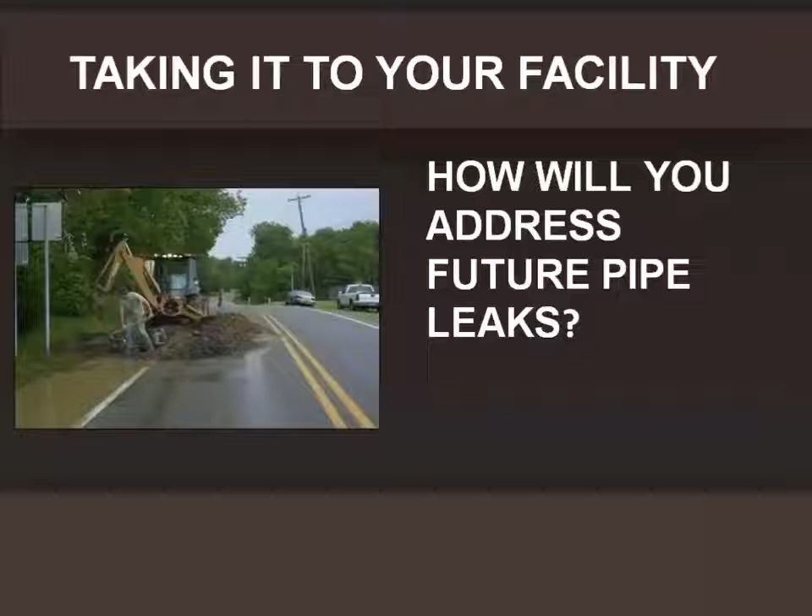And then how do you want to address your future pipe leaks? What areas might you want to actually do a pipe replacement? When might you want to use pipe repair? And then figure out your replacement cycle. Is it reasonable? Does it make sense to you? Are you carrying too much risk? Have you communicated the risk of having a long replacement cycle?